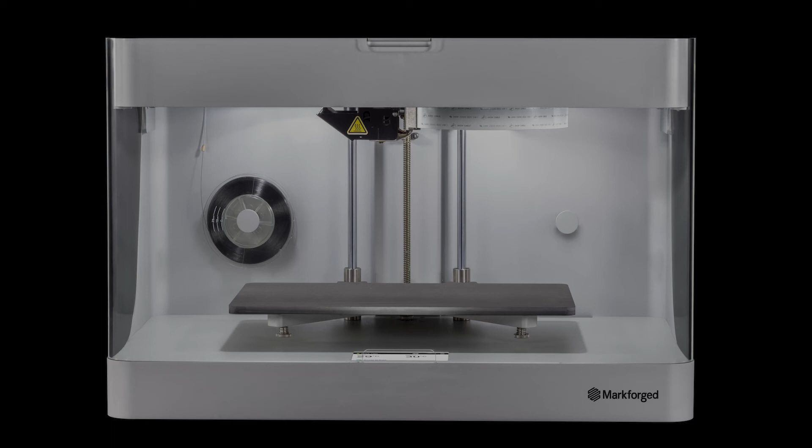I'm an application engineer here at CamLogic, and I'm excited to show you some tips and tricks for DfAM, better known as design for additive manufacturing. In today's video, I'll be going over the importance of knowing where your start and stop point is in your part based on the kind of geometry that you may have.

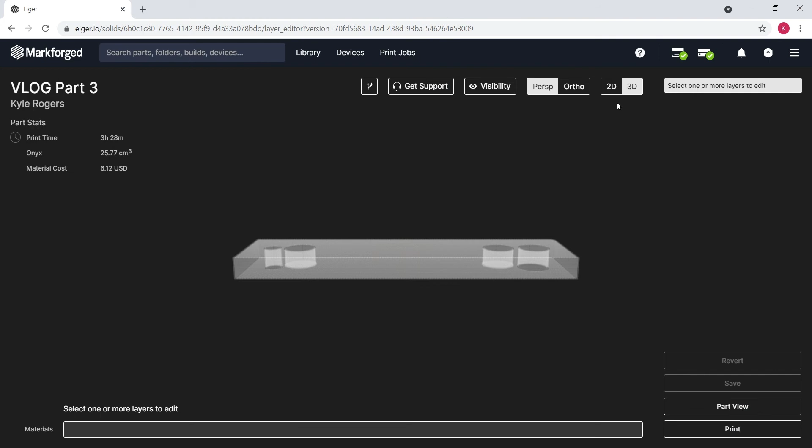As you can see, we have 3 different examples of showing different kinds of geometry to see exactly where it puts that start-stop point. Jumping into our first example, we'll go into the internal view and go to the 2D. And if we zoom in to this upper left corner, in relationship to your printer, this will be the back left corner of your build plate. You can see that the start-stop point is put right there on that corner.

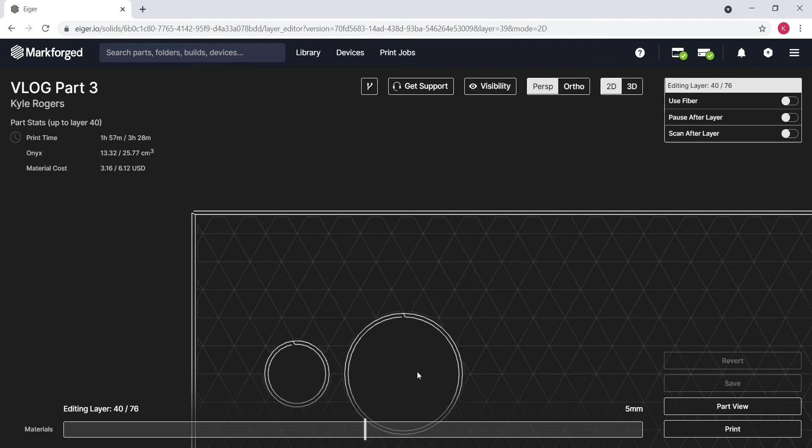Now when we cycle through the layers, you can see that it keeps that start-stop point consistent throughout the entire print, so it keeps that seam right in that corner. Now if we look down here at these 2 holes, you can see that it puts the start-stop point towards the back of the printer. And when you cycle through the layers again, you can see that it keeps that start-stop point in a constant position throughout the entire part. And you'll be able to see more examples of that when we jump into this next example.

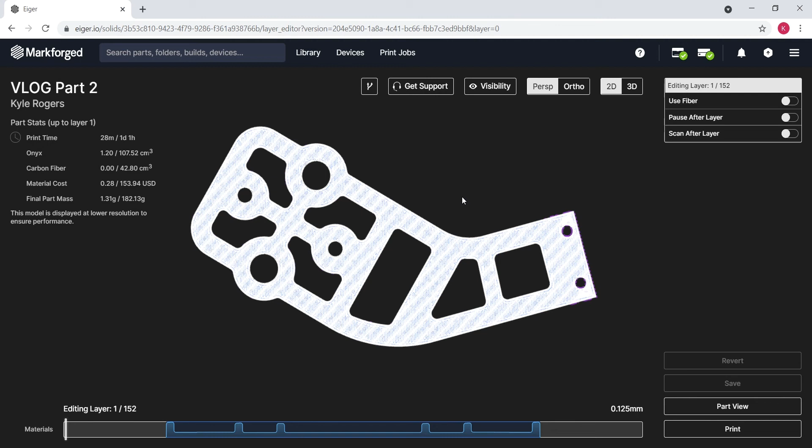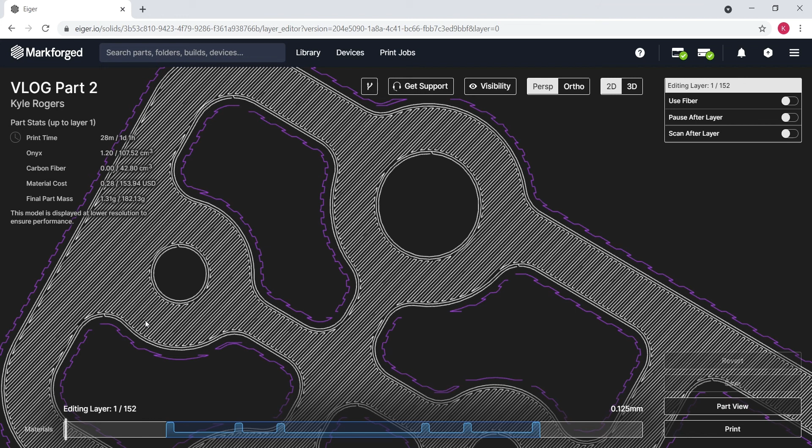In this example, we'll zoom into the left corner again, and you can see that it puts the start-stop point towards the back of the printer regardless of where it falls on this geometry. Unlike the last example, it doesn't have a true corner for the start point to be, so it's just going to put it at the furthest point back on that feature as your start-stop point. And looking around at the other features on this part, you can see that it keeps that start-stop point consistent with facing towards the back of the build plate, regardless of where the start-stop point is in relationship to the part.

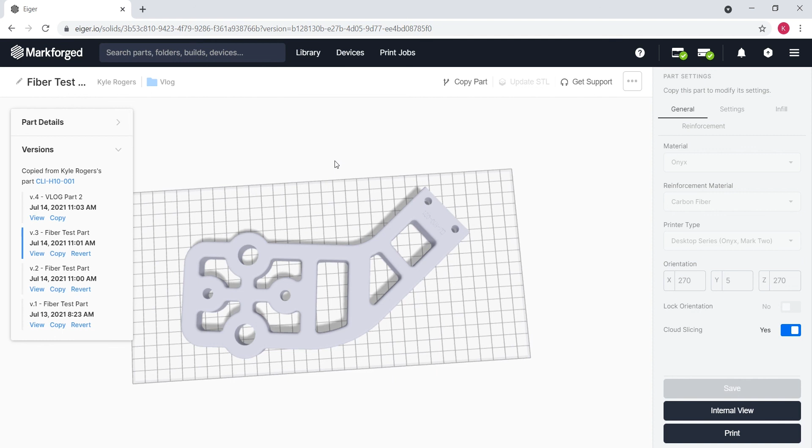Now, one thing to keep in mind here is that we do have a corner that we could go ahead and use as our start-stop point. Now, in order to get that corner to be our start-stop point, we'll have to go through and change the orientation of our part on the print bed to get that corner to be the furthest point towards the back of the build plate.

Now, to confirm that that did what we wanted to do, we will jump back into our 2D view, and you can see now that it puts that start-stop point on your outer layer at this top corner, regardless of it being in the back left or the upper right. It's going to put it in the furthest point back of your build plate, and it keeps that consistent throughout the entire part.

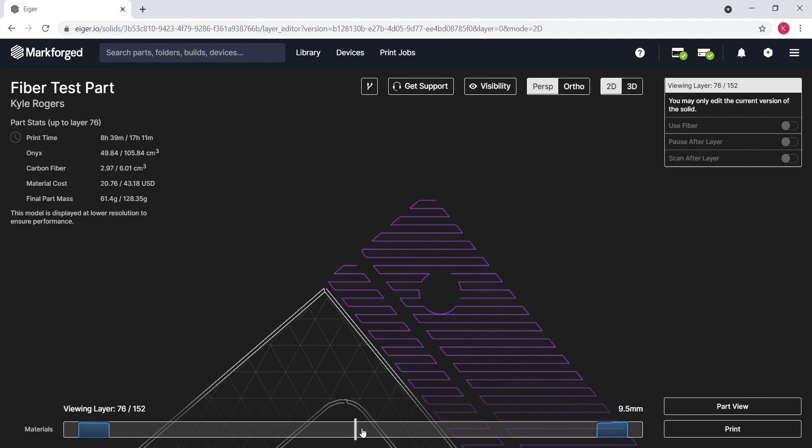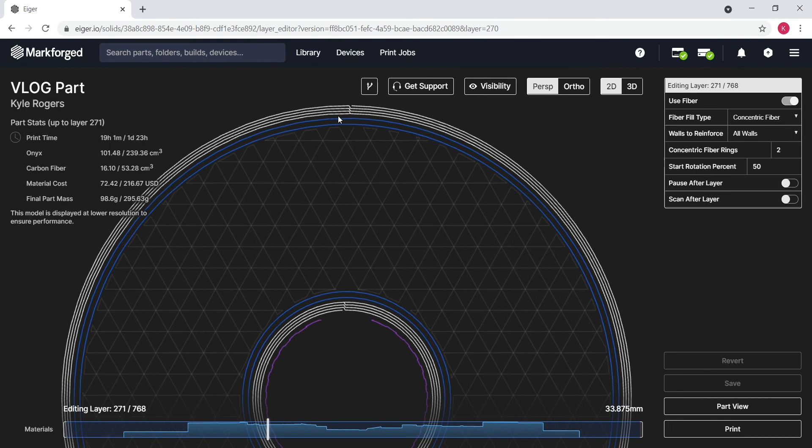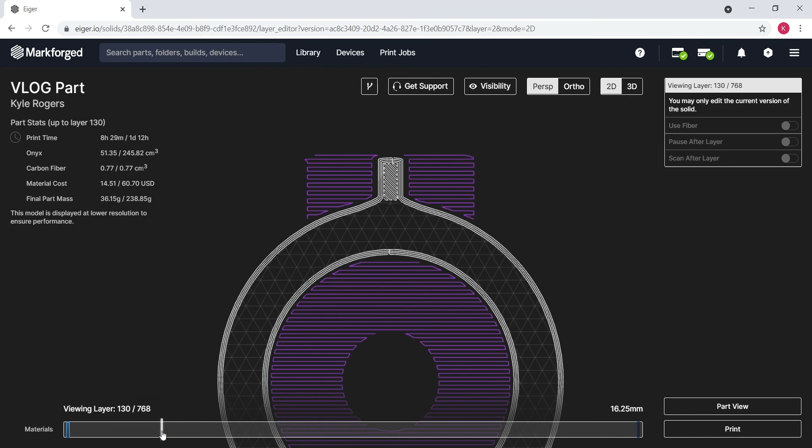Now a different example of this is if we have a different orientation where this boss feature is facing towards the back of the print. Now what this will do is it'll put the start-stop point in the back still, but as we scroll up through the layers, you can see that it's going to have that start-stop point where your supports are. Now essentially this will still work, but you'll get a much better quality print when your start-stop point is not going to be starting where your supports are, and you'll have a much cleaner surface when you remove your supports.

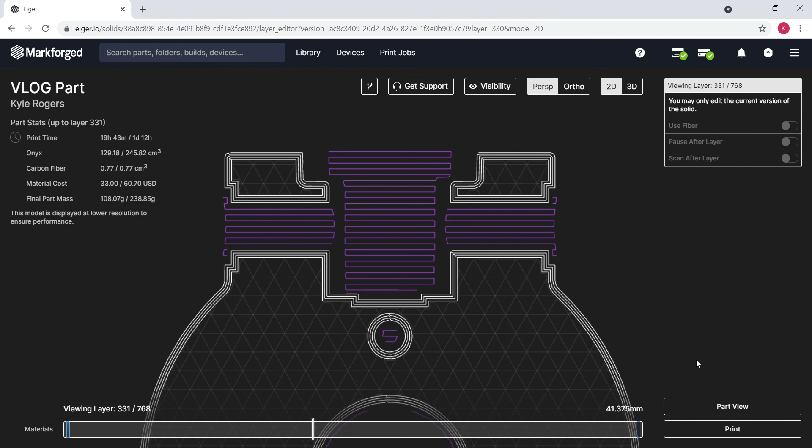Scrolling through this geometry, you can see that the start-stop point changes based on the kind of features that you are printing for this particular layer. Now, I hope everybody enjoyed the video and was able to take away some tips and tricks on how to move the start-stop point to ensure that you get a good part.